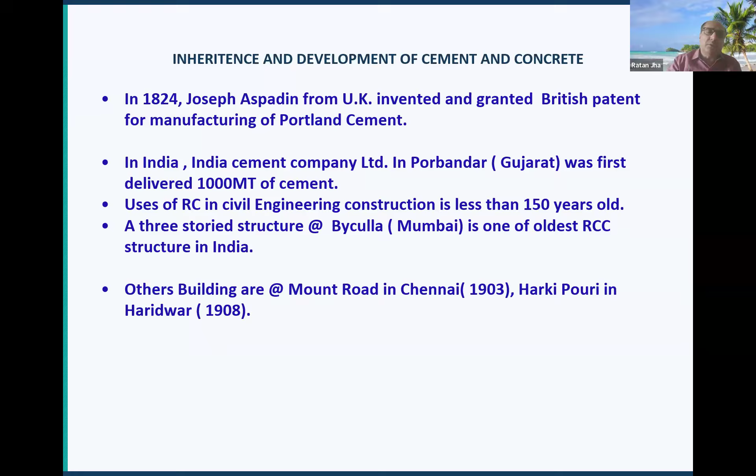This slide reflects the cement overview—nearly 700 million tons of cement capacity are there, which Indian cement companies altogether can manufacture annually.

Average production is currently roughly 495 million tons per annum. Per capita cement consumption in India is roughly 290 kg. Per capita cement consumption world average is nearly 470 to 520 kg approximately.

Per capita cement consumption in China is 1,320 to 1,370 kg. From this slide, from this data, we can see exactly where we are.

We are behind the world average with respect to per capita cement consumption, and we are far behind China, which is our competitor and neighbor as well.

I think you also know that any country's GDP growth is directly related to cement and steel consumption in that country. So we are lacking in this respect also.

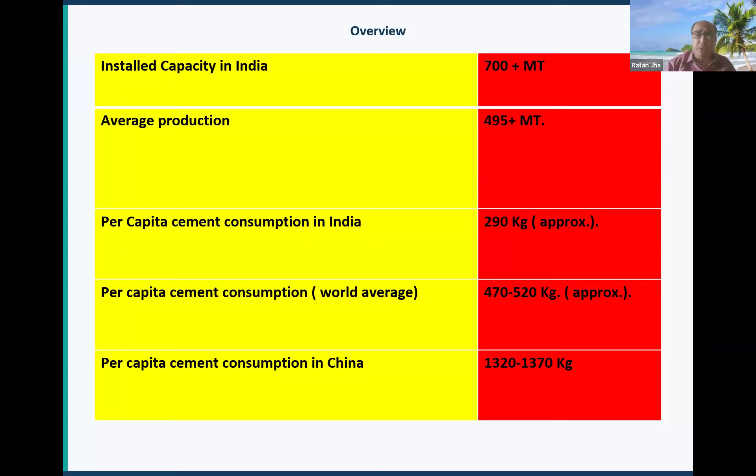We all have to think over it. These are the different IS codes for the different types of cement. There are 21 or 22 types of cement in India.

Some are in general use, like OPC 33 grade—now obsolete—OPC 43 grade, OPC 53 grade, OPC 53S for sleeper grade, which is used in railway sleeper manufacturing, and Portland slag cement. There are many other special types of cement with their respective IS codes.

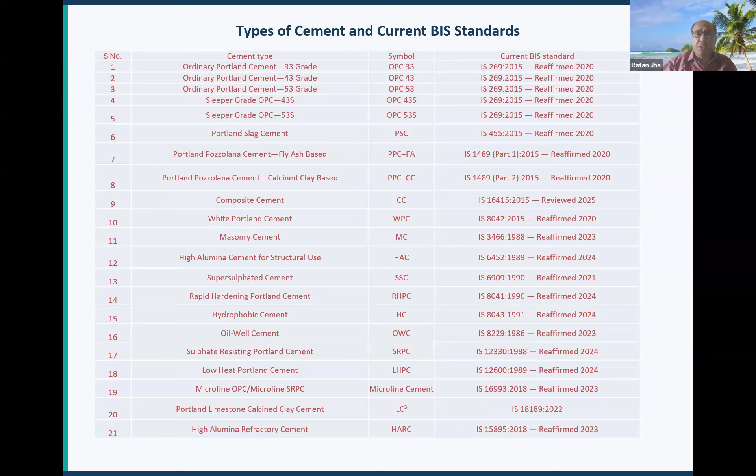When we talk about concrete, as you all know, concrete is the largest consumed man-made material on earth, and it is the most largely consumed material by humankind after water.

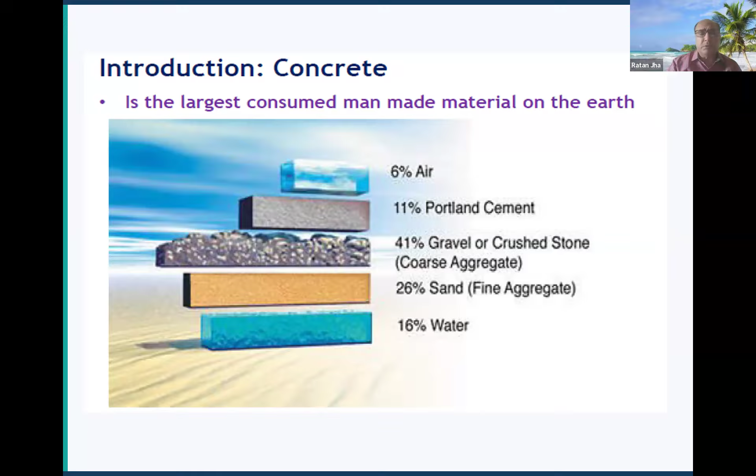So 26% are fine aggregate, as I said, and roughly 16% of water. These are the approximate constituents of any concrete.

After water, concrete is the most widely used material on earth. Nearly 30 to 35 billion metric tons per year of concrete are being manufactured, and concrete outperforms most construction materials in terms of strength and durability, requiring very little maintenance.

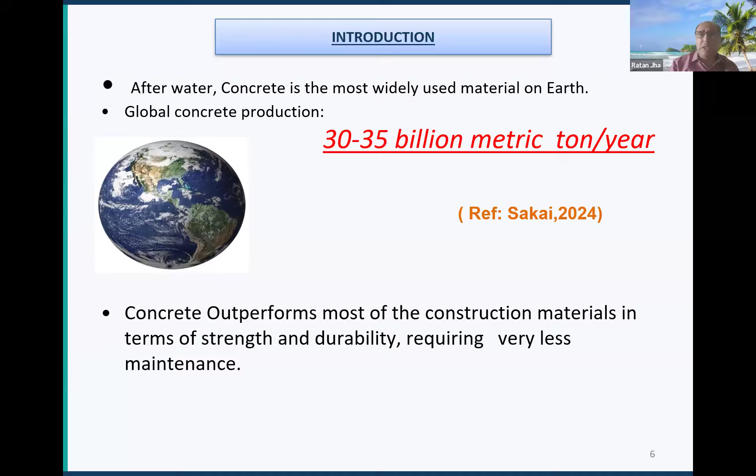When we talk about durability, it is very vague in terms. So the important goals of a concrete structure, when we manufacture any structure or building, as an engineer what should be our aim? First, the safety of the structure, then economy of that structure during construction, durability of the structure, and of course the sustainability of that particular structure.

So safety, economy, and sustainability are functions of durability. To get safety, economy, and sustainability, we have to make our structure much more durable. Hence, achievement of durability is most critical in concrete-based construction, and it needs a proper quality management process.

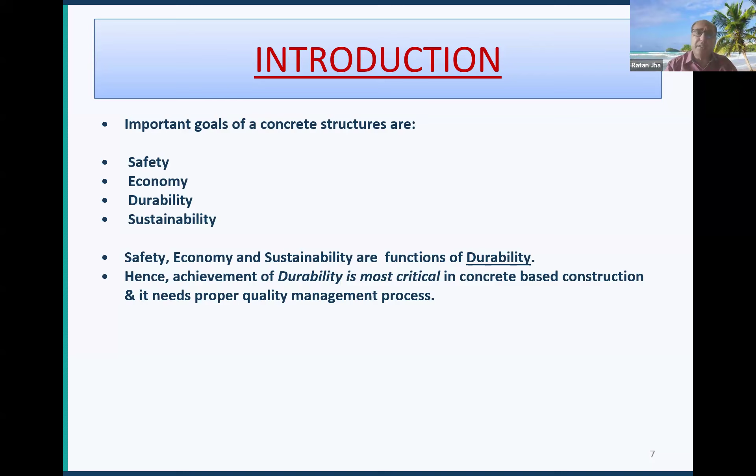We have to think over it. We have to follow standard rules and regulations at any project site where construction is going on.

So a basic definition of durability: durability is the ability to last a long time without significant deterioration. It is directly related to the lifespan of the structure without any undue maintenance and repairing. A durable material helps the environment by conserving resources and reducing waste and the environmental impacts of repair and replacement.

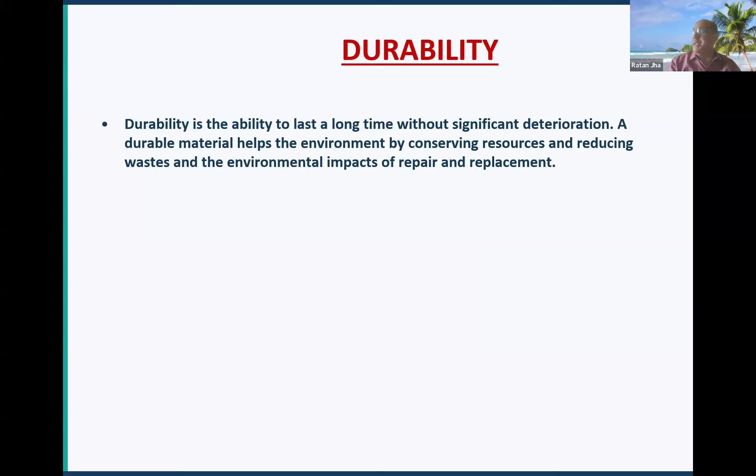In another way, what is durability of concrete? It is the ability of concrete to resist weathering action, like chemical attack, humidity, abrasion resistance, or rainwater, etc.

So what are the durability requirements? It is the fulfillment of the requirements of structural safety and serviceability within the planned use and foreseeable actions, without unforeseen expenditure on maintenance and repair, as I said in the earlier slide.

So durability means nothing else. It is the lifespan of any concrete structure without any undue maintenance and repair.

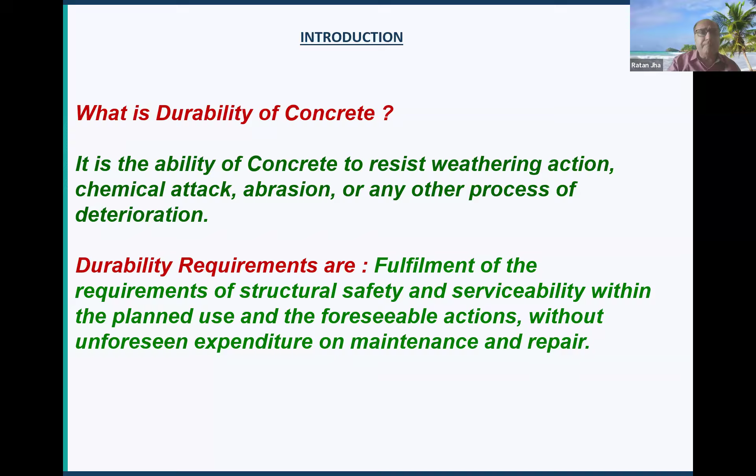About 50-60 years ago, construction engineers were not much concerned about durability, because once we achieved strength of concrete during construction, we assumed the concrete structure would remain stable, remain safe, and remain in service life for many years. So durability became an issue only when the following problems were noted all over the world.

Mainly in the UK and USA, during the winter season, during heavy snowfall, when snow overlapped the roads and bridges, to ease traffic at a very early period, they were putting salt over that ice to melt it very soon so traffic could resume. But due to this process, the de-icing by salt, several cracks in bridge decks were found.

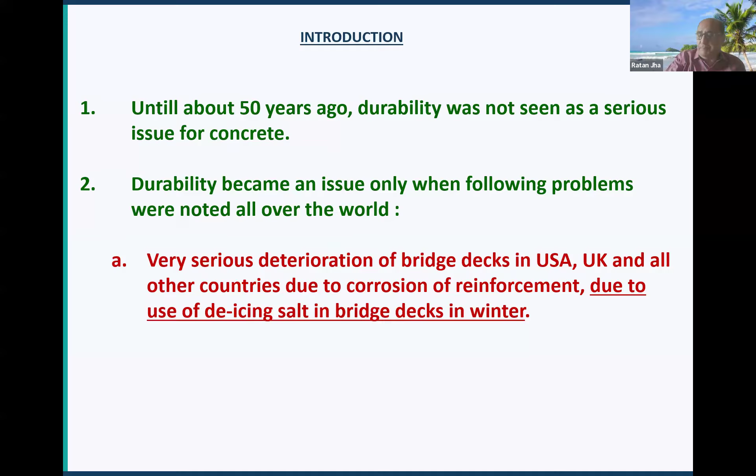As we know, the major deterioration problems in the Middle East are due to chloride-induced corrosion in a particularly aggressive environment, mainly in the Middle East. So there is severe cracking in structures in many countries resulting from alkali-silica reaction.

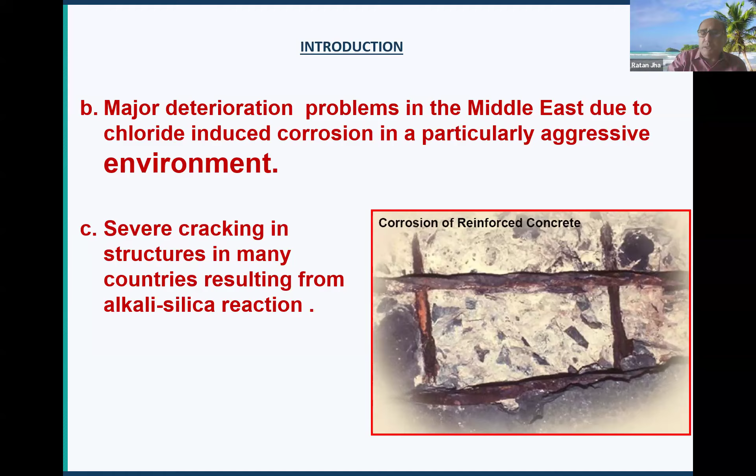These are the few regions where construction engineers and project engineers started thinking about durability as a main concern. They started giving more emphasis, or equal emphasis, to durability parameters along with strength parameters as well. So you can see the deterioration in bridges in various regions.

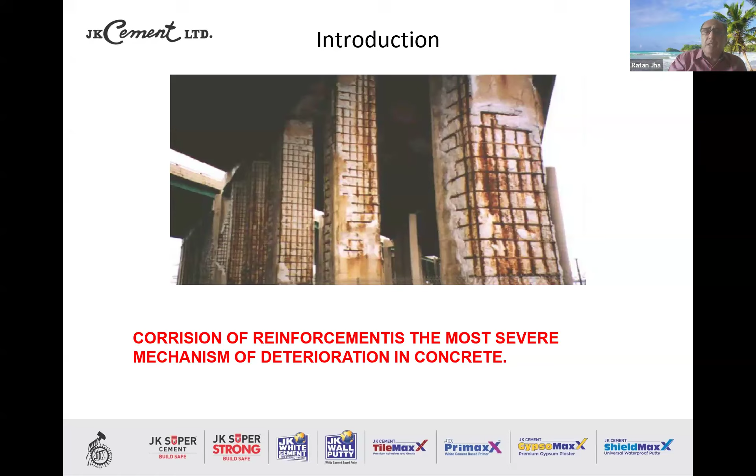So corrosion of reinforcement is the most severe mechanism of deterioration in concrete. Corrosion in rebar concrete happens due to many reasons, not a single reason, but it is the main problem which construction engineers are facing nowadays.

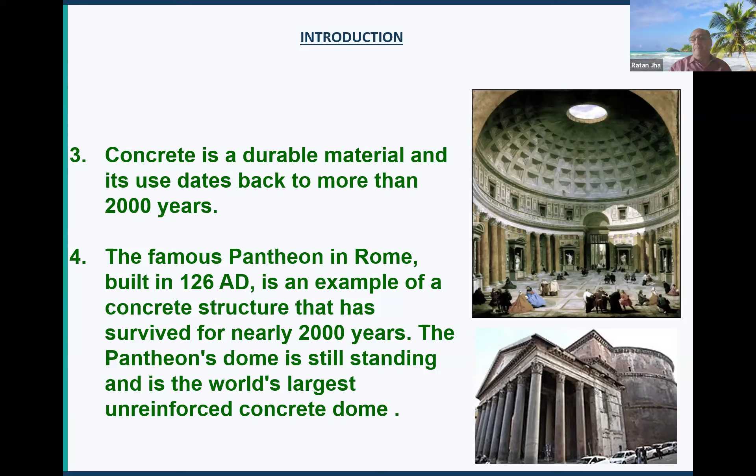Concrete, as we all know, is a durable material, and its use dates back more than 2000 years - I'm talking about concrete, not RCC. The famous Pantheon in Rome, built in 126 AD, is an example of a concrete structure that has survived nearly 2000 years. The Pantheon's dome is still standing and is the world's largest unreinforced concrete dome. Steel was not used in that particular dome structure.

This is our Mumbai structure, the Gateway of India, built in 1924. Still, it is very, very strong.

The structure has 13-meter long RCC piles and domes of reinforced construction. The structure is hugging the Arabian Sea and is subjected to severe environmental conditions, but it is safe.

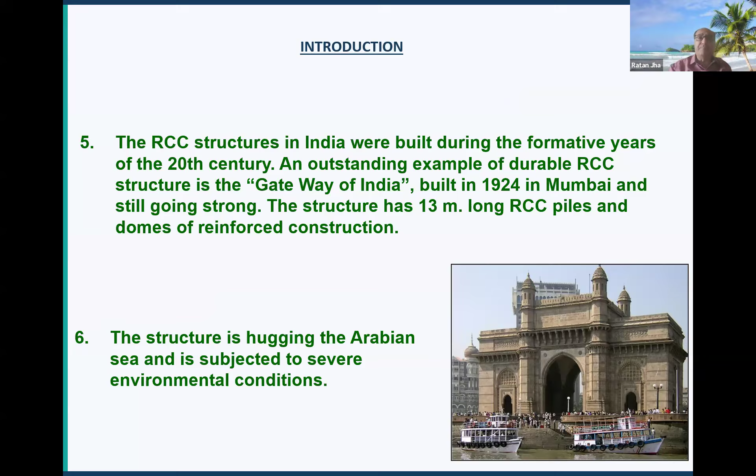That is the traditional approach in tackling the durability issue in most of the national codes and standards, including the European codes, which is to specify certain dimensions to satisfy.

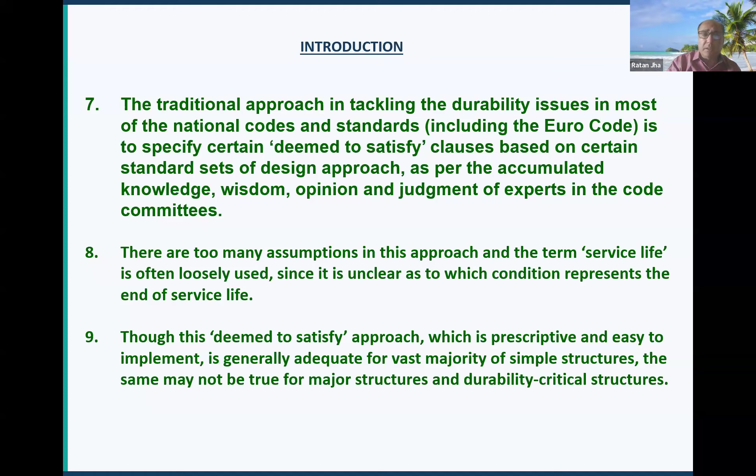This deemed-to-satisfy approach, which is prescriptive and easy to implement, is generally adequate for the vast majority of simple structures. The same may not be true for major structures and durability-critical structures.

So on an average, the expected service life of different types of structures: monumental structures like temple, mosque or church is 500 to 1000 years. Steel bridges, steel buildings or similar structures are 100 to 150 years. Concrete bridges, high-rise buildings or stone bridges are nearly 100 years. Residential houses nearly 60 to 80 years, concrete pavements 30 to 35 years, and bituminous pavements are 8 to 10 years. This is a roughly estimated service life of different types of structures.

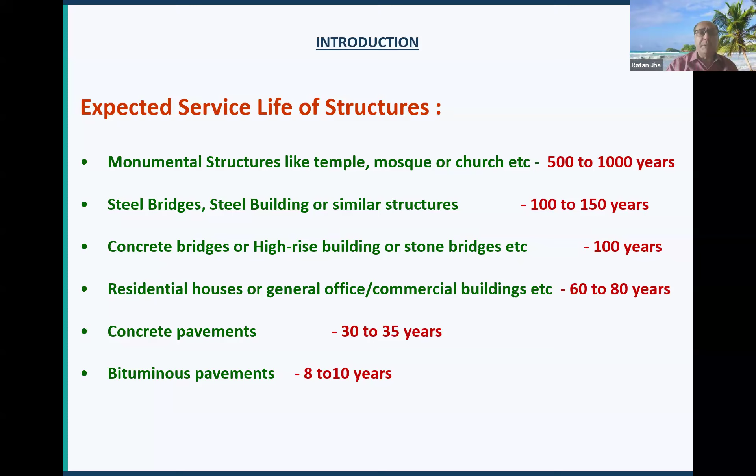So what are the factors which affect durability directly or indirectly? First, the service environment in which the structure withstands, or its detailing, that is cover, shape and size of the members. Construction method, that is workmanship, is very, very vital and important with respect to the Indian scenario.

Type and quality of materials used, cement content and water cement ratio, are once again very, very important technical parameters, which are mostly and majorly neglected. Repair and maintenance - so these 6 parameters directly affect the durability aspect of concrete, and of course the concrete structure as well.

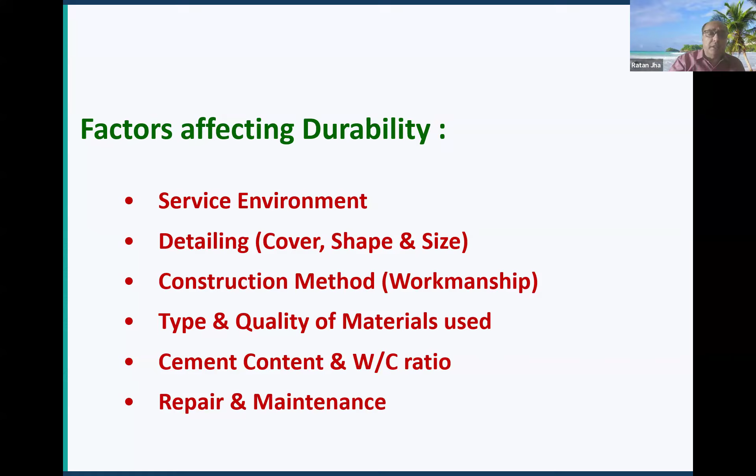So factors affecting the durability phenomena or parameters, we divide into 2 parts: first, the concrete system itself, and second, the aggressive environment itself. First, we talk about the concrete system.

What are they? First of all, the material. If you talk about the concrete system, first of all the material and process - what material we are using and what process of making good quality concrete we are adopting.

First, the materials: binder type, what type of binder, what type of cement we are using, binder content, that is quantity or percentage, aggregate in its type and quality, admixture, which type of admixture we are using, and the mix design of concrete.

These are the material selection. Another is process: mixing process, transporting in case of RMC, compaction, curing, temperature, and workmanship. This is the concrete system, which is totally in our control as an engineer.

Another is the aggressive environment. In these, there are 2 types, physical and chemical. Many of these parameters are not in our control.

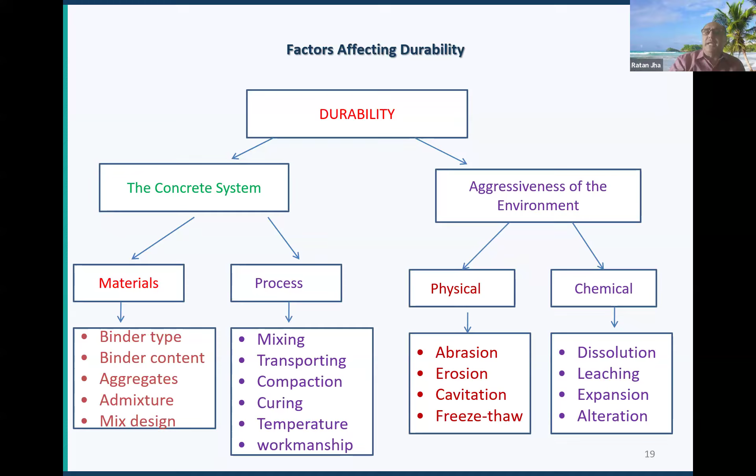Of course, physical factors include abrasion, erosion, cavitation, and freeze thaw. Abrasion, erosion, and cavitation are in our control. Freeze thaw totally depends on the climatic condition. Chemical factors include dissolution of salts, leaching, expansion, and alteration. So these are a few factors which directly affect the durability aspect of concrete.

If you talk about the deterioration mechanism, the most severe part of deterioration is reinforcement or prestressing steel corrosion. I think all of you are aligned with this assessment. I repeat once again, the most serious or most general form of concrete degradation is due to corrosion of reinforcement steel, and this corrosion happens due to many reasons.

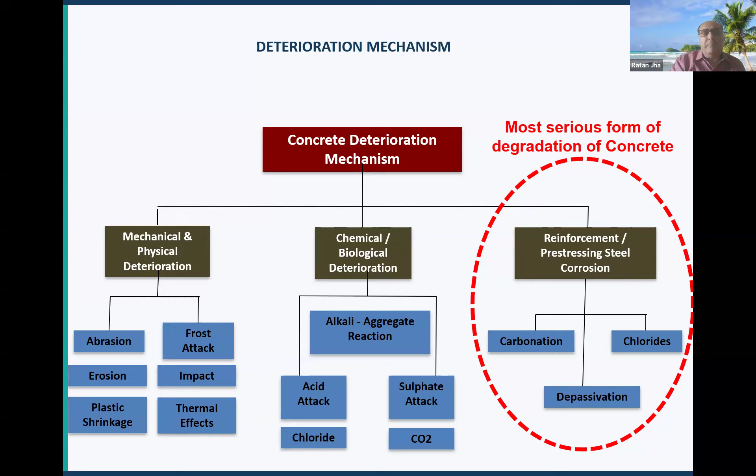So the root cause of early signs of deterioration or distress of concrete structures in India - I am talking about the Indian context only - is lack of professionalism and understanding of the nature and properties of concrete. Since we are engineers, we should discuss our own shortcomings. So there is inadequacy in current codes and standards. Still, many codes have already been revised, but some codes are yet to be revised in concrete-related matters.

Design and detailing defects - I will show some photographs in coming slides. Poor workmanship or quality control at construction stages.

In India, we have a huge manpower. We don't have the shortage of manpower, but we are lacking badly in the skilled workforce - those who can execute the work properly and effectively, those who understand the technicality of construction, of concrete and steel structure. So we also have to work over it, and we have to get our workforce properly skilled.

Poor maintenance or upkeep, poor accountability and rampant corruption in the society - these are the few parameters in the Indian context, the main causes of deterioration of concrete structure.

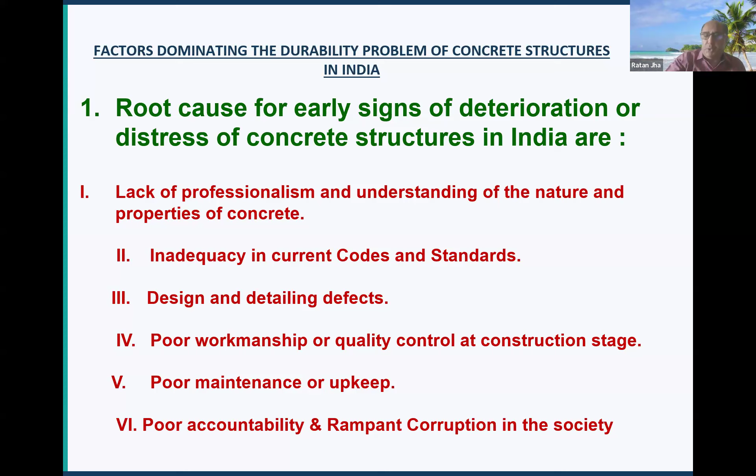So what is the lack of professionalism? Many site engineers are unaware of the minimum number of cubes to be taken at site for acceptance of concrete. When I was in JK Cement and I used to visit many project sites, this is my personal experience - many site engineers are not aware how many cubes for each stage of concrete testing should be cast and tested.

There is considerable ignorance regarding the benefits of use of blended cement. Still, even yesterday, I had a discussion with a very senior person about the usage of blended cement and its quality parameters. Some myths are still there, not only among customers but I can say the majority of civil engineers and project engineers are reluctant to use blended cement.

Generally, the focus at site is progress and not quality.

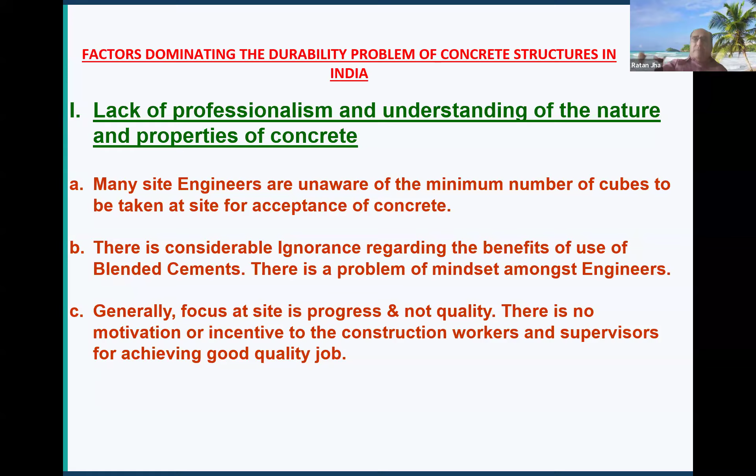There is lack of training and lack of adequate knowledge of site staff regarding methods to be adopted for achieving the desired quality of concrete at site.

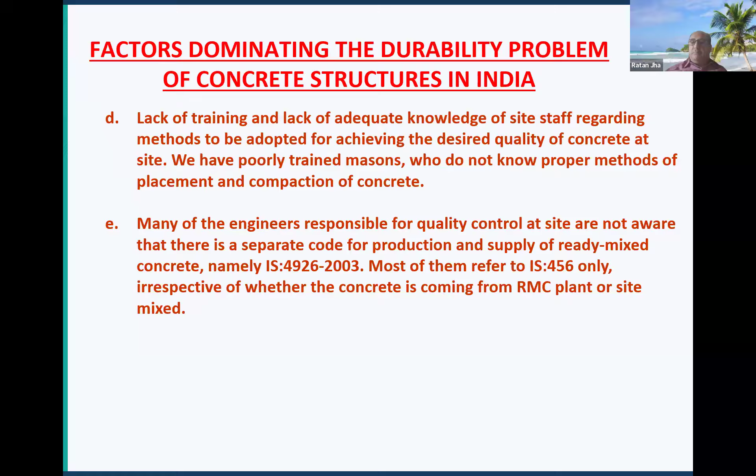If at site we make concrete versus RMC, there are two different codes. When we pour the concrete at site, we follow IS 456. Whereas for RMC, we follow IS 4926. If you ask many engineers, they are not aware about this.

Inadequacy in current code - I am talking about the cement code only. IS 1489 part 1, that is fly ash based cement - we are still regularly getting 28 day compressive strength of PPC cement nearly 53 to 58 MPa at the age of 28 days. Still, as per the code, requirement is only 33 MPa. Why is it not being revised?

These should be revised. If we are getting 50, 55, 56, 58 MPa like 43 grade, and that is the reason many site engineers and customers are not using, or rather are reluctant to use blended cement or fly ash based cement, because they think this is an inferior cement. But the fact is just the reverse. If you use blended cement, either PPC - Portland Pozzolana Cement, or PSC - Portland Slag Cement, it has much technical advantage over ordinary Portland cement, whether it is 43 grade or 53 grade OPC cement.

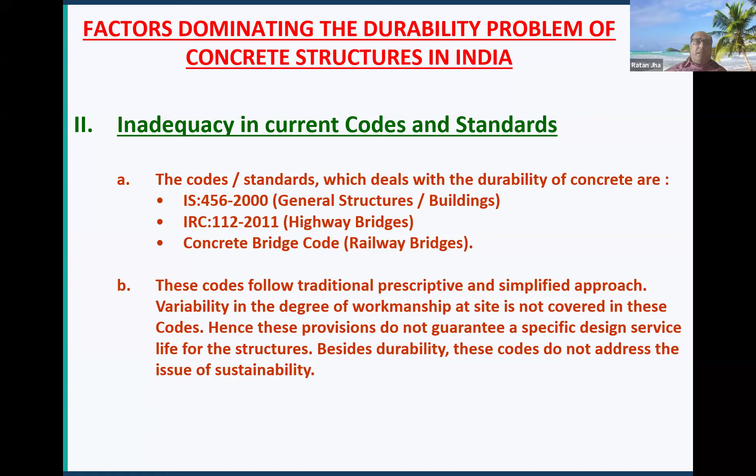These codes follow a traditional, prescriptive and simplified approach. The current philosophy is more towards a performance-based approach for reliability and design service life.

See, design defect - here we are responsible. You can see some of the structures which collapsed either just after completion of the project or during construction itself. Mandovi Bridge in Goa 1986, building collapse in Chennai 2014.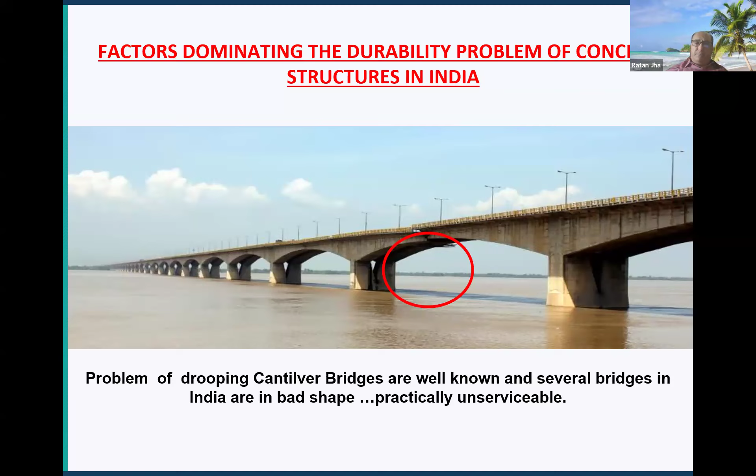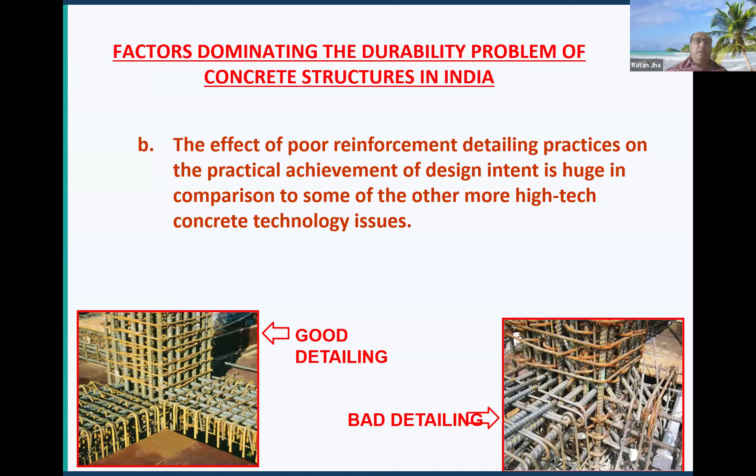Poor workmanship at site is a result of several factors. Major factors are lack of accountability of individual engineers.

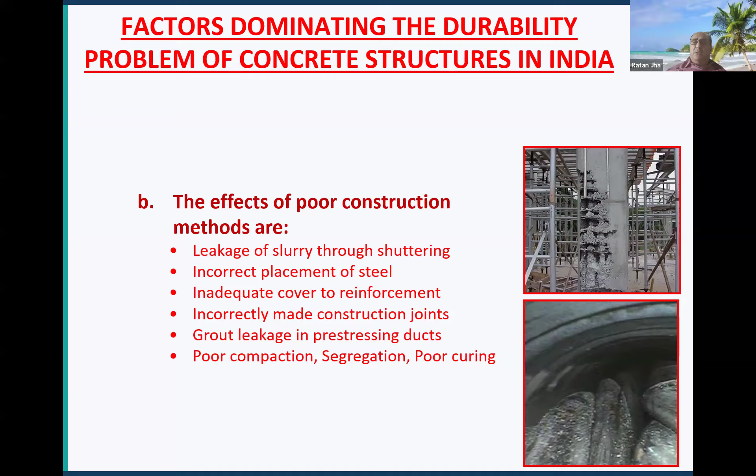So these are the negligence. Even we as engineers know the after effects. We know what problems will arise if we neglect this, but somehow we are neglecting it. That should not be done.

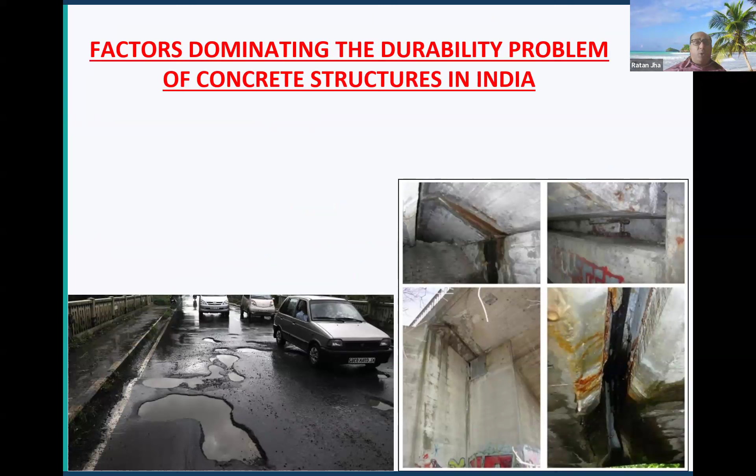Poor maintenance, of course. As a result of poor maintenance during the service life of any structure, you can see some patches and some stains which directly or indirectly affect the durability and span or life of any structure.

Poor accountability and rampant corruption in society. There are massive amounts of bribery and corruption in the construction sector in India, particularly in the government sector. I'm not directly blaming anyone, but we all know how work is done and how commissions are distributed and asked for, even in the private sector as well - not everywhere, but at some places.

Coupled with the corruption, there are two passive attitudes that we find prevalent in our society. One is the notion of chalta hai, and the other is the concept of jugaad.

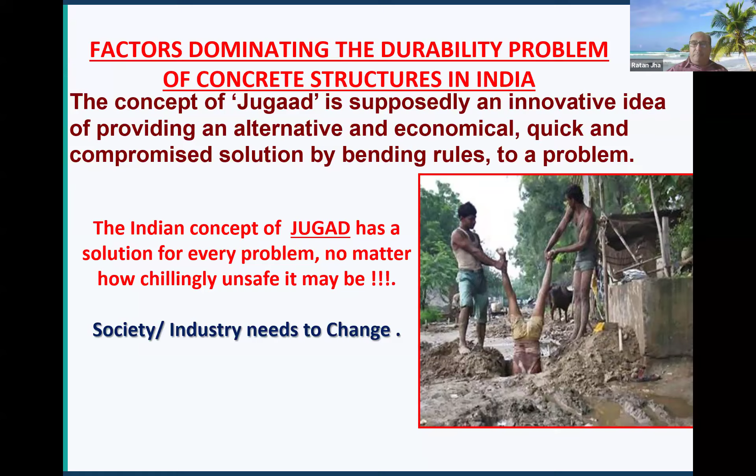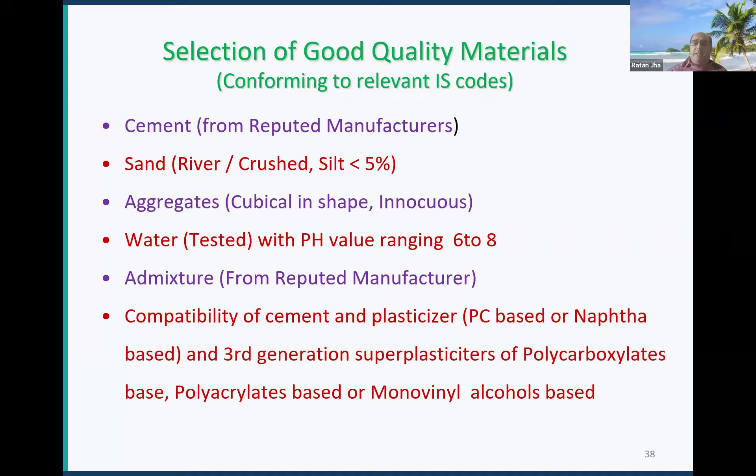Admixture should be from a reputed manufacturer, and before using the admixture we must check its compatibility with the binder, that is the cement. Cement, the sales cement, is a hydraulic binder and should be chosen based on actual quality parameters, not on perception or attractive advertisement. PPC, PSC, I already told you, this myth we must break.

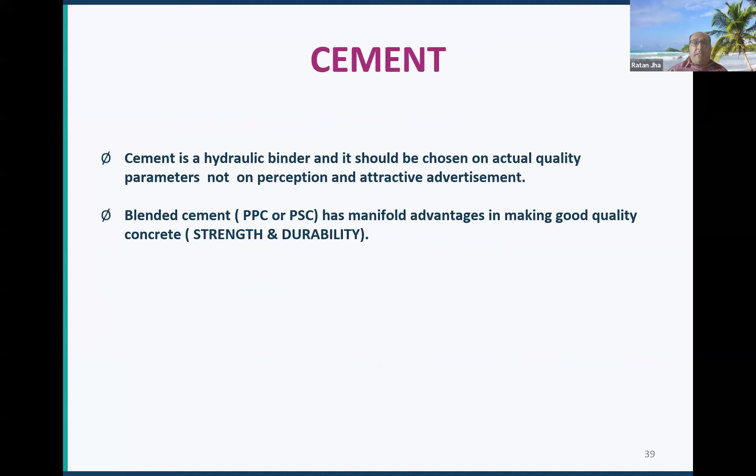When we talk about durability, PPC or PSC, that is Portland Pozzolana Cement or Portland Slag Cement, have much more advantage than ordinary Portland cement. That I can assure you, as I have worked many years in a cement company.

So why blend cement? Based on performance and environmental benefits. If you compare ordinary Portland cement versus PPC cement: cement plus water in both cases, primary hydration occurs in both cases. After primary hydration, what happens?

CSH gel forms and calcium hydroxide is liberated. In PPC also, calcium silicate hydrate gel forms and calcium hydroxide is liberated. Up to here, the chemical reaction is similar in OPC and PPC.

After that, in OPC, what happens? Degradation of concrete starts. Why? Because the liberated calcium hydroxide remains within the cement concrete and is not reused. But in case of PPC, first in OPC, that calcium hydroxide reacts with carbonic acid from the environment.

In addition, with humidity plus carbon dioxide, it converts into calcium carbonate, which is insoluble. Once again, in combination with carbonic acid, it forms calcium bicarbonate, which is soluble in water, and leaching of concrete starts in terms of efflorescence. This leaching makes your concrete more porous, more vulnerable, and this is the main reason.

This is one of the main reasons for reinforcement corrosion at early ages—very early ages, I can say within 2 or 3 years of construction of a bridge or any concrete structure. Whereas in Portland Pozzolana Cement or Portland Slag Cement, what happens?

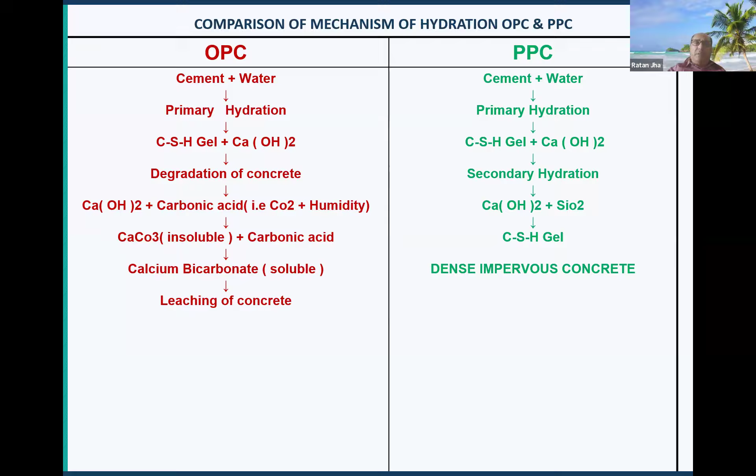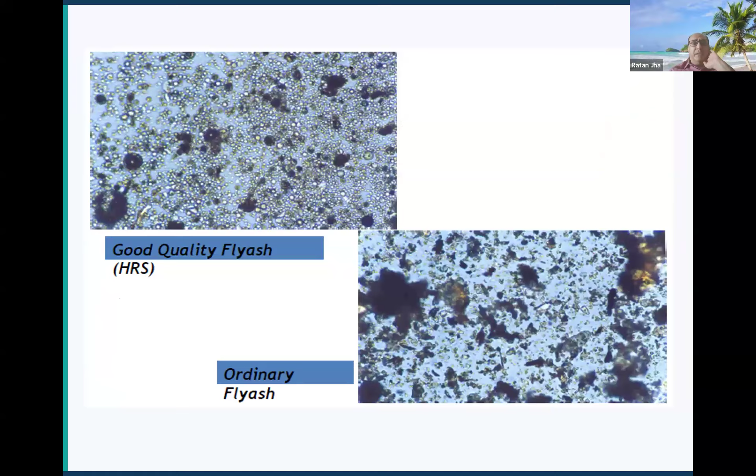Usage of high quality fly ash with high reactive silica—these are SEM images of normal fly ash. How does fly ash increase the properties of concrete? First, dispersion of cement particles and availability of larger surface area for hydration, because the fineness of fly ash is much larger, giving a larger surface area for hydration.

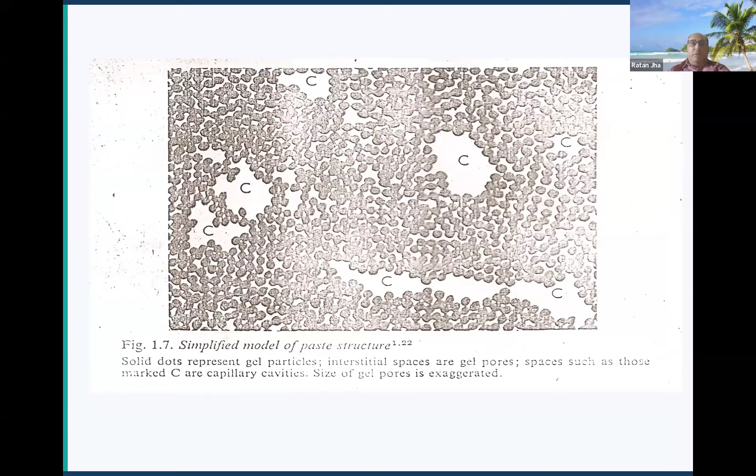There is a reduction in the amount of trapped water between cement particles because it is denser. This is the particle packing effect, reducing voids, as I have shown—if more CSH gel forms between these two particles, voids will reduce and your concrete will become denser.

Reduce water requirement to achieve a given consistency - this is the ball bearing effect. The spherical shape reduces interparticle friction, and due to this friction, at early ages, stress will develop and concrete structure cracks. But in case of PPC, due to the ball bearing effect, the interparticle friction is significantly reduced, and the stress is ultimately reduced, so there is minimal chance of cracks at early ages.

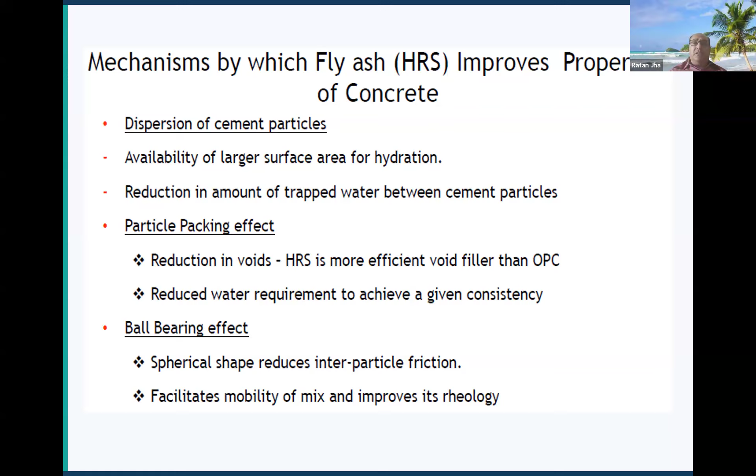See, this is the ball bearing effect. In every type of construction, we can use the blended cement, PPC.

Effect of water cement ratio on durability: permeability is the contributory factor for volume change, and higher water cement ratio is a fundamental cause of higher permeability. As I have just said, it is a thumb rule that if you increase the water content into concrete, I have heard from some very learned concrete engineer that if you increase water content by 5% into concrete, the strength of concrete will reduce by 15%. Not only strength will reduce due to higher permeability, but durability, or you can say the life of your structure, will drastically reduce.

Failure of concrete is a cyclic process. Use of higher water cement ratio results in increased permeability. Permeability increase leads to volume changes. Volume changes cause cracks to appear or disintegration. And if your concrete disintegrates, failure of concrete is bound to happen.

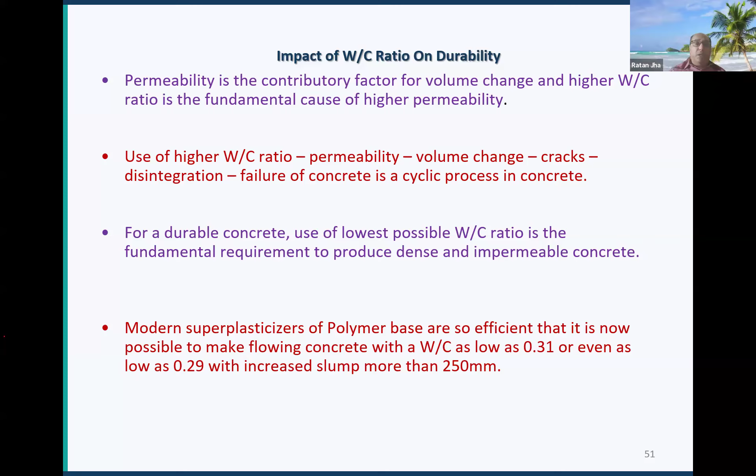For a durable concrete structure, use of the lowest possible water cement ratio is the fundamental requirement to produce dense and impermeable concrete. Nowadays, with high quality polymer based plasticizer and admixture, you can even make concrete as low as 0.31 or 0.29 water cement ratio. This is the concrete quality management process.

I am skipping a few slides. So as far as workmanship is concerned, these are all related to workmanship. First of all, the batching of concrete should be very genuine and fair. Mixing of concrete should be thoroughly done. Transportation within the specified limit.

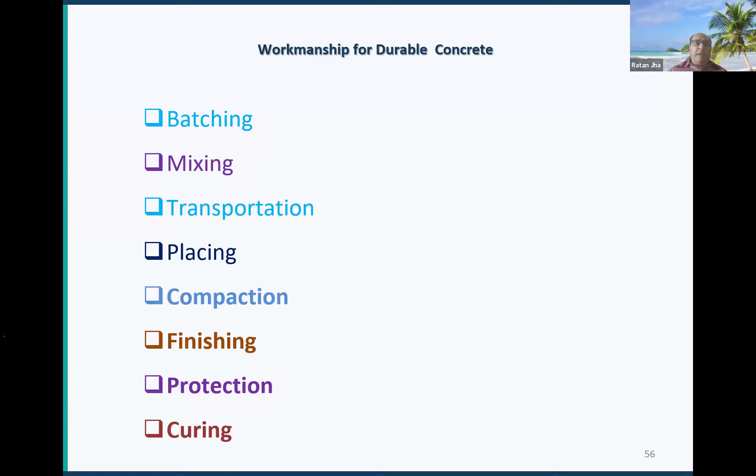Compaction of concrete is very important. Even 1% void reduces your concrete strength by 5%.

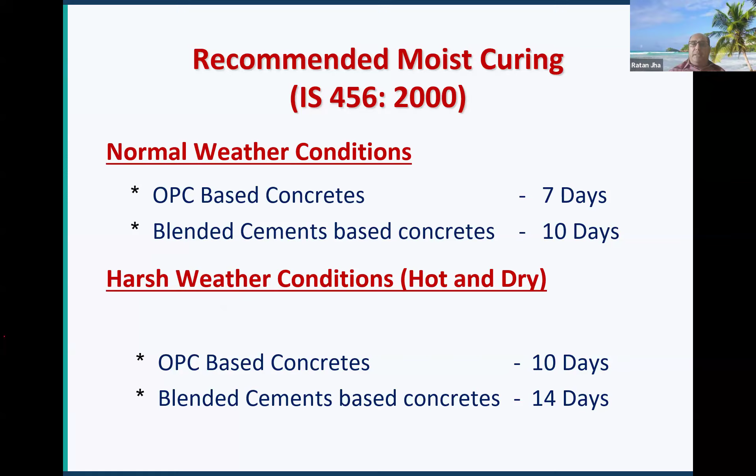Curing, I have already explained. So as per IS 456, if you use OPC based cement, curing should be done for 7 days; for blended cement in normal conditions, 10 days. In blended cement, PPC or PSC, you have to do the curing for a few more days because the chemical reaction is happening not only for 10 days, but even 28 days, 3 months, 6 months, 180 days. So you have to cure the concrete for a longer period of time if you use blended cement.

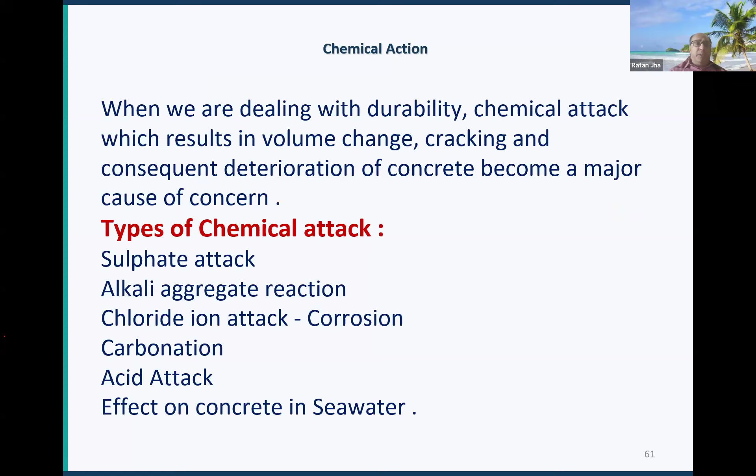Chemical environment. So types of chemical attack: sulfate attack, alkali aggregate reaction, chloride ion attack corrosion, carbonation, acid attack, and effect on concrete in seawater. These are the chemical actions which directly happen to concrete.

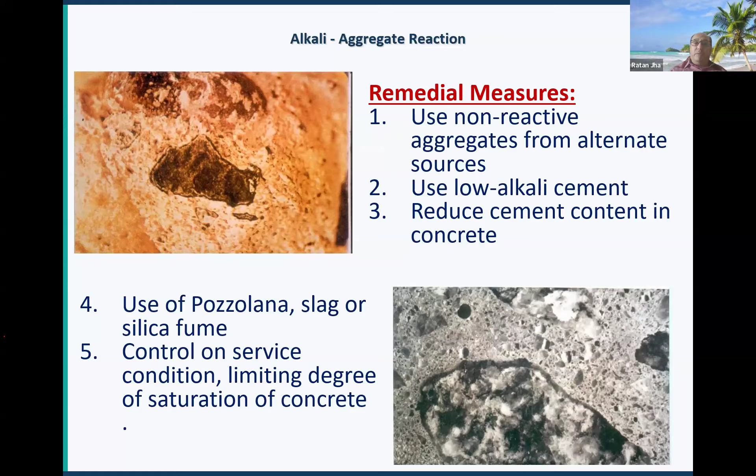Sulfate attack - I'm not going to explain each and every slide, some slides I'm skipping. So due to alkali aggregate reaction, you can see. So here, remedial measures: use non-reactive aggregate from alternate sources, use of low alkali cement, reduce cement content in concrete, use of pozzolana, slag or silica fume.

Control on service condition, limiting degree of saturation of concrete. Chlorides in concrete as per IS 456 - chloride in concrete increases the risk of corrosion of steel, that is an electrochemical reaction. Higher chloride content or exposure to warm moist conditions increases the risk of corrosion. Even in cement, we have to maintain the chloride content in cement at less than 0.1%. But chloride content is not increasing in concrete due to cement alone; some other sources like water, soil, and other aggregates also contribute.

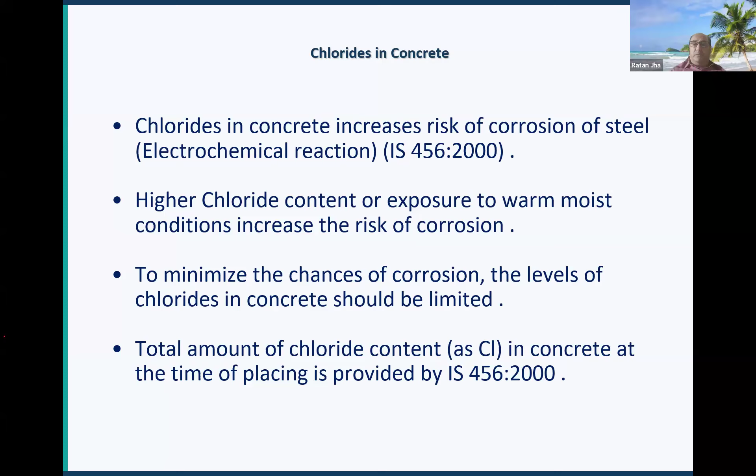So we have to take care of it also. To minimize the chance of corrosion, the levels of chloride in concrete should be limited. The total amount of chloride in concrete at the time of placing is provided by IS 456 2000. Corrosion is an electrochemical process - that's the basic mechanism.

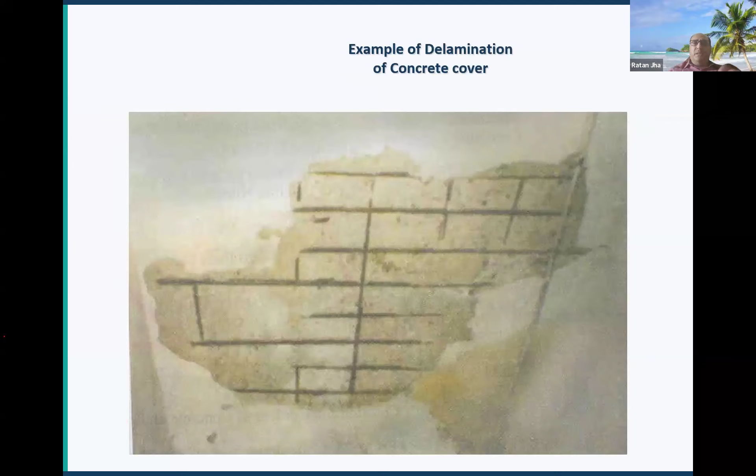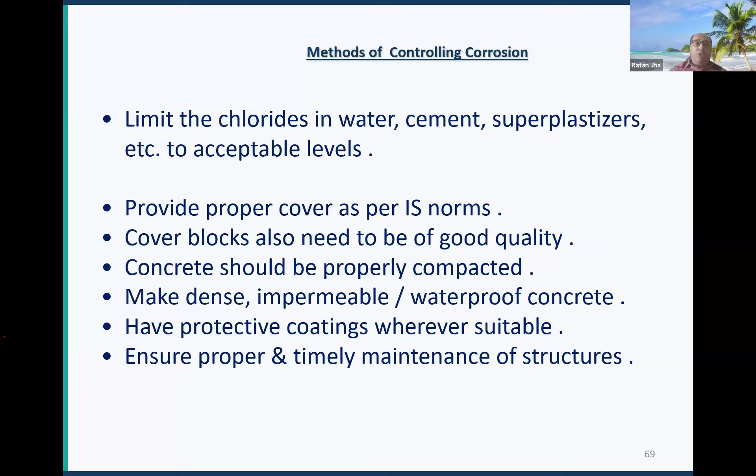Concrete should be properly compacted, which is very very important and related to workmanship. Make a dense, impermeable, waterproof structure. Add protective coating wherever suitable. Ensure proper and timely maintenance of the structure.

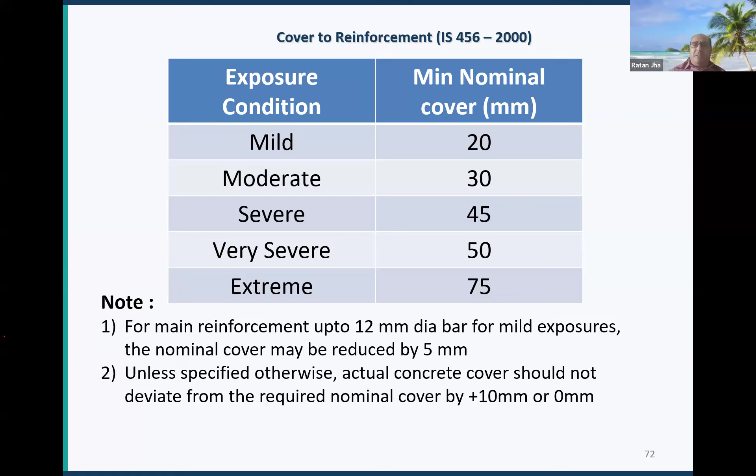You can see in the images - cover to reinforcement, in mild condition minimum 20 mm, moderate 30 mm, and this is given in code IS 456 2000. Severe condition 45 mm, very severe 50 mm, and extreme condition 75 mm. We all should know about this.

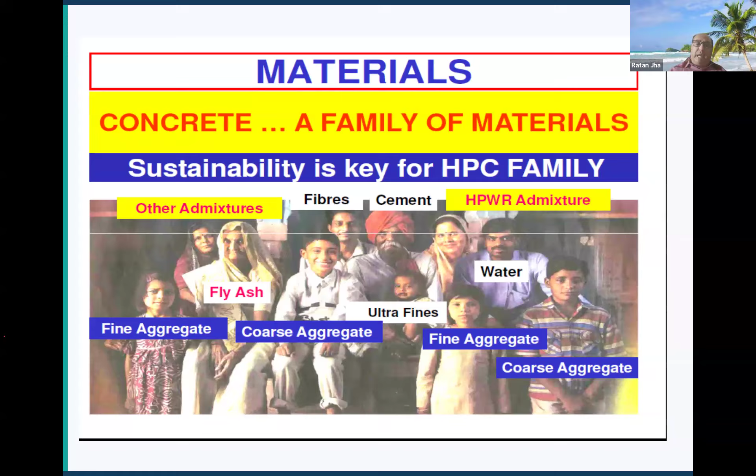So in concrete, if you see this photo - there's an old grandfather, a grandmother representing fly ash. Each and every member we have denoted - water, fine aggregate, coarse aggregate - each contributes in the family. So in case of concrete, each and every constituent has some role in making good quality concrete.

So what are the concluding remarks from these slides? Strength and durability are two important properties of concrete. We as engineers, when we talk about concrete, give more emphasis on the strength parameter only. But nowadays, making a structure itself is a very costly and tricky affair.

So we as engineers should think about the durability aspect also. Nowadays in the urban sector, high-rise buildings are in use at a massive level. So the durability aspect, meaning the lifespan of that particular structure, is very important.

So to make our concrete structure much more durable, having a larger span of service life, what should we do? First of all, selection of ingredients - the materials we select for use should be proper, based on quality parameters. Right type of materials and right concrete for the appropriate end application - where to use what.

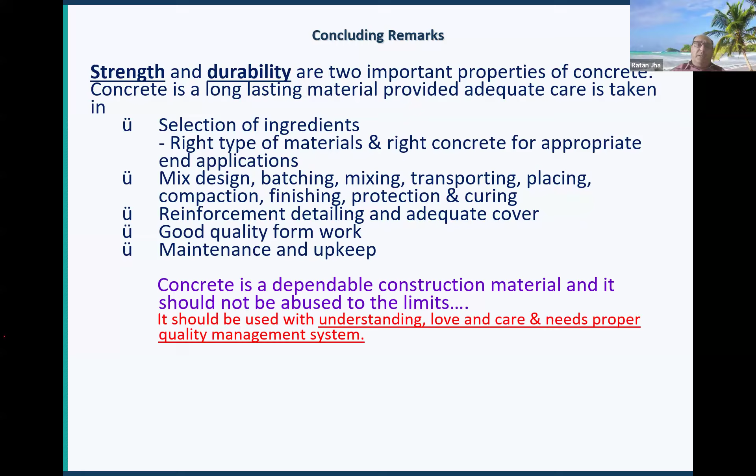So this is all about concrete quality and its management. Any questions out of it?

Hello, any question? No sir, no question. Sir, hello, can you hear me? Just a minute, just a minute.

Yes, tell me. Hi sir. My name is Ravindra Patil, I'm working for US Corps of Engineers. Just a moment, please speak loudly.

For early strength concrete, if you use fly ash, since early strength concrete requires it, while using fly ash, can we achieve the early strength?

Exactly. What is your name please? Ravindra Patil. Yeah, Mr. Patil, if you want early age strength, PPC cement has some limitation because if you use PPC cement, the heat of hydration is a bit less, so at the age of 7 days, compressive strength is a bit lesser than OPC cement.